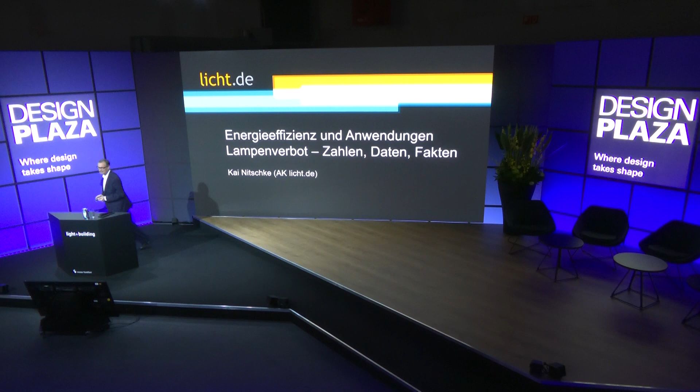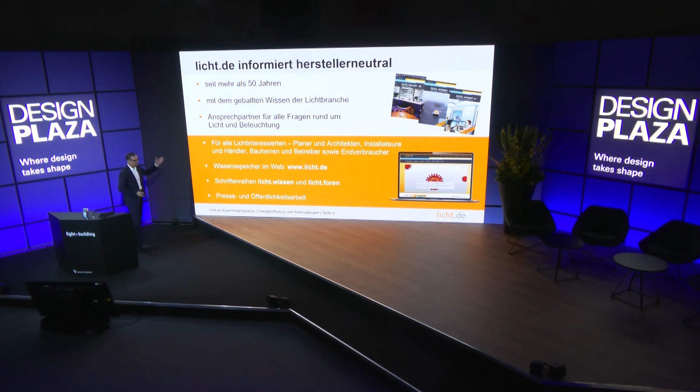My name is Nitschke, I am from licht.de, working group licht.de. Who is licht.de? It is a neutral platform. You can find us on level 0, 3.0, in existence for more than 50 years. We are a neutral source of information, the accumulated knowledge of the light industry. I work for one manufacturer, but we are a neutral source of information. Good for you if you need information.

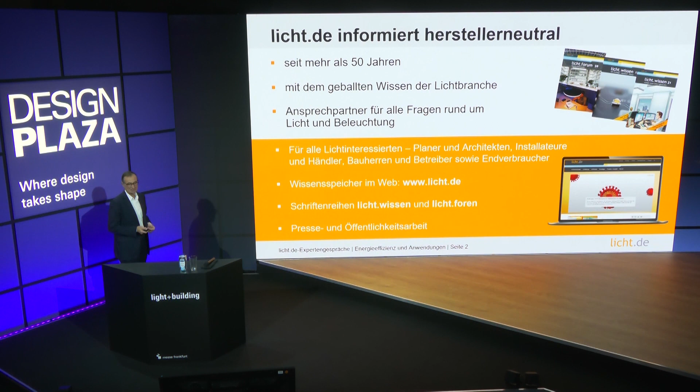So we are contact partners for everything that deals with light, and our target group, our customers, are people who are interested in light: planners, installation, architects, owners of a building, operators, and consumers. And we do have a manifold information offer on the internet, just like our publications that you can also see downstairs in Hall 3.0. We do have this very intense PR activity.

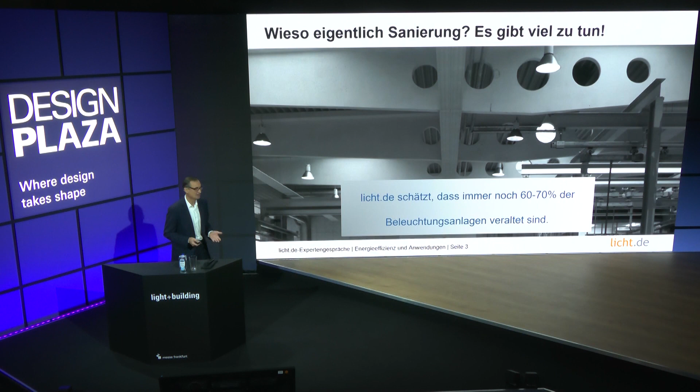I personally am working in the light industry since the year 1980. I always dealt with renovation of light lamps. Do you remember the 38mm fluorescent lamp? They changed up to 26mm in the past. They are the ones that are phased out because we simply have better alternatives.

Looking at this chart, you see that every year we talk about 12.3 billion euros spent for electricity for the lighting design, and we're doing so in areas that are non-residential housing. We talk about 2 million of them in Germany. It is the non-residential buildings where we also need heating. We talk about garages, about agriculture, but garages are not included, agricultural buildings are not included. And we talk about a net floor area of

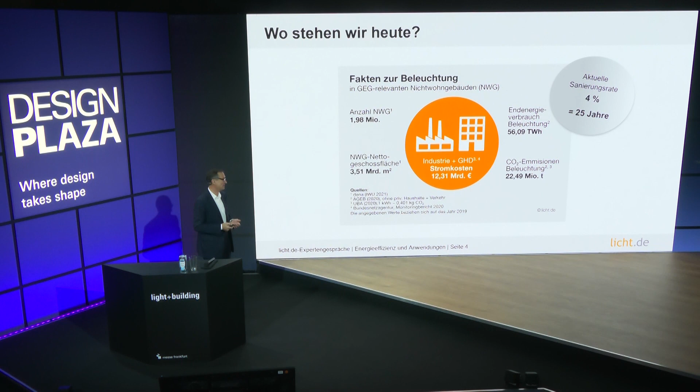3.5 billion, and 4% are being renovated every year. So it'll take 25 years until everything is renovated and up to the latest state of the technology. So we strive to make headway, and that's what I'd like to show.

This graph shows you - Jürgen Waldorf has already shown you, Jürgen Waldorf from ZVEI, these are the official regulations. So next year, the thinner and the thicker fluorescent lamps T5 and T8 are no longer allowed to be sold. If you know a wholesaler who sells, you're allowed to sell, but we're no longer manufacturing them.

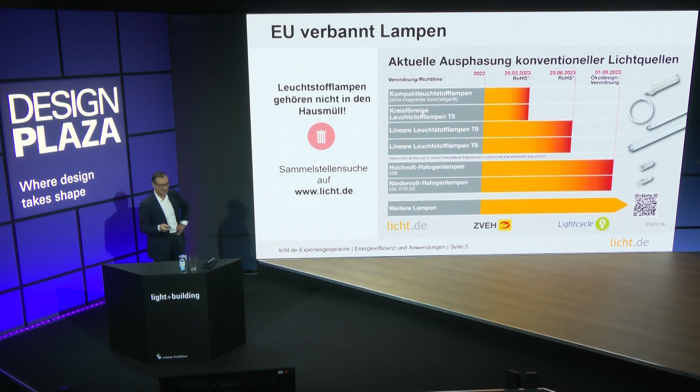And then we also said this red symbol is important for us. The old lamps cannot be used for domestic waste, so don't throw them away in your domestic waste. Then in August we have two regulations, ecological design and RoHS, so no mercury via the lighting products, and that's why it is being phased out. And that only works if we have efficient alternatives.

And if we retrofit everything, think about the old units, something we discussed at the beginning - this is what we had before. We're talking about energy cost savings. Nothing is more updated and topical than saving energy costs. The old products are being phased out.

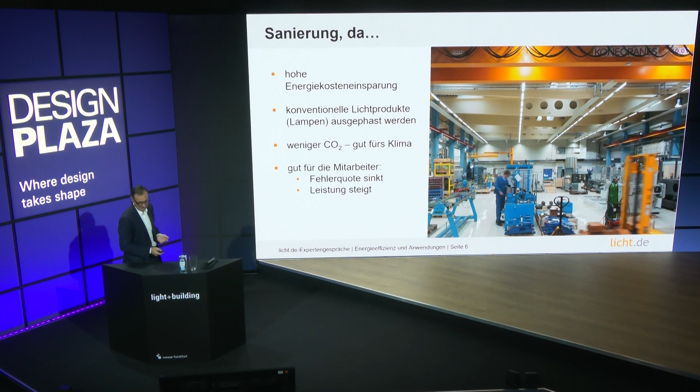That's good for our environment, less CO2 emissions, and I will show you a chart later. It is good for our employees: better light, better working conditions, more performance, fewer errors. So light has an enormous influence on the working performance and the number of errors.

Renovation, in different ways and manners. The most simple solution is retrofitting. That's simple, right? As you see, retrofit is not the best solution, but at least the easiest. It's better not to change a new light bulb in an old lighting system, just change the entire lamp. So savings potential will increase, but also the effort will increase.

It is even better if we do something that we call light management. Are we doing that? Sometimes. Often, not really. So that's what we have to do. During this time, in the next years, we'll see that everything that is operational will have light management.

And I am from licht.de, so we give you a lot of hints for light planners, for those who plan lighting design. If you plan light design professionally with the right values and the right factors, by taking into account the right criteria as part of a professional light planning, one can save even more energy. Can you quantify? Oh, yes, we can. So here again you see this staircase graphed in a different way.

You see the savings values, relative savings on a percentage basis, and you can also double-check in euros for your current situation.

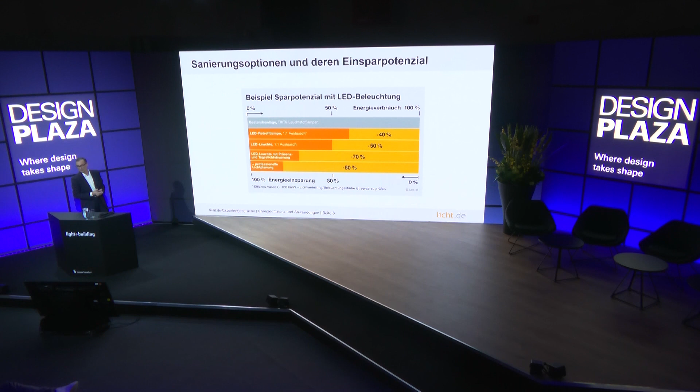You save up to 80%, as I just said, by taking into account daylight and presence control, and professional light planning. Looking at all the building blocks, what do we need?

Of course, we need a lamp. The lamp has a certain efficiency.

Do you know the subsidy program BEG, the German federal subsidy for efficient buildings? It's easy to get the money from the state, 15% of the retrofit, and the requirement for this subsidy for light strips is 140 lumens per watt.

The light industry can do much more than that. We talk about 180 lumens per watt in our light bands. If you have this type of lamp in your company, in your installation, you save energy. You save money only by having a more efficient, better lamp.

Fewer lamps, less performance, and still, at the end of the day, the lifespan. So you have different products.

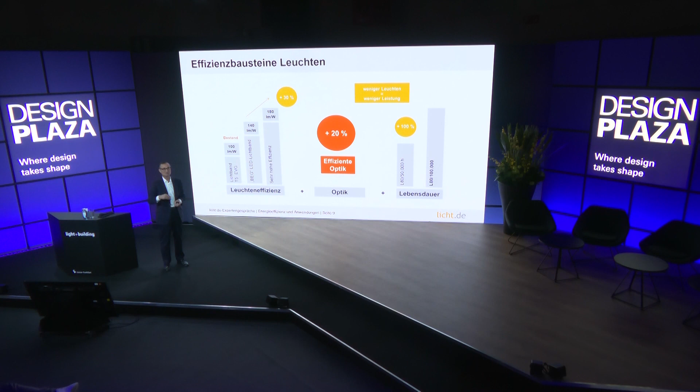We have this so-called L80 value, 50,000 hours, and after 50,000 hours, 20% less light. And we have products that are not as good—after 50,000 hours, 30% performance loss. They will be cheaper, of course.

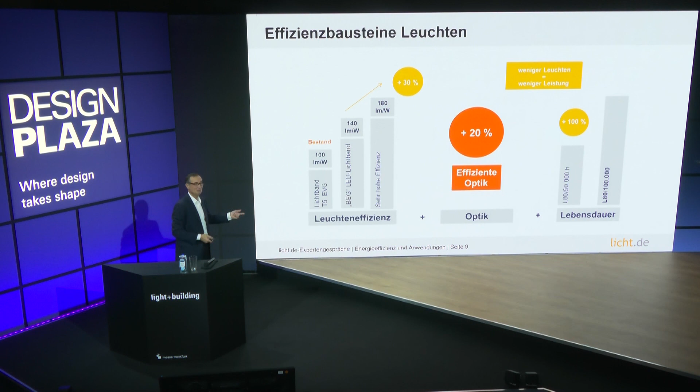Quality is an important question. We talk about the life cycle of a product and the price. So these efficiency components are required for a lamp.

We also have the sensors. The sensors will be most sustainable when we talk about daylight and presence, as checked on this chart.

So we see daylight is used—we have the first row of lamps, and then we start to dim the light, because in the room you have the daylight, as we see it right here. This is an essential component of high savings, depending on the daylight you have.

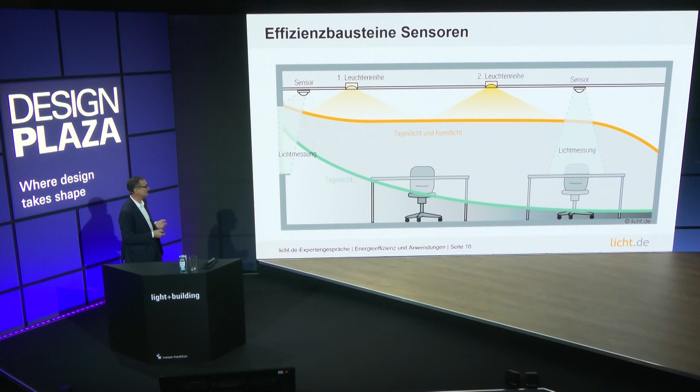And you see, the building energy laws give us a lot of help for the calculation, so that we can do the daylight calculation. This looks like a very professional way of planning the light situation in your building. And here again you see presence sensors, daylight usage, you see what happens during the day.

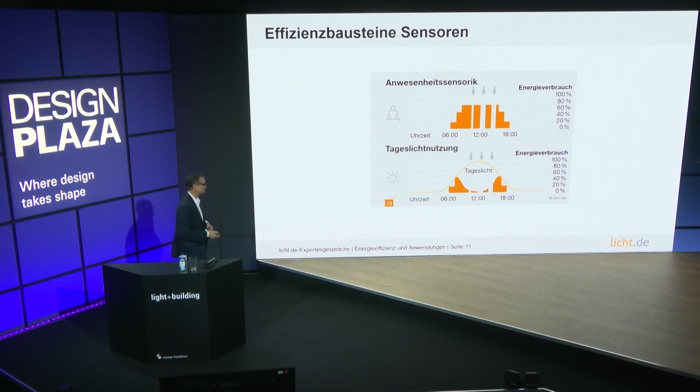And we also have savings potential. This is how we generate our savings potential.

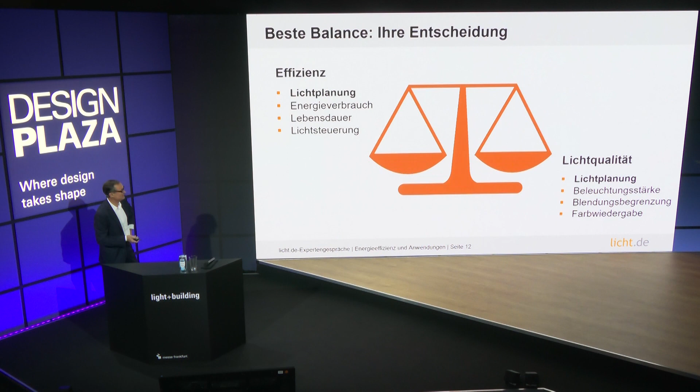Now I would like to see some scales. Here we go—everything in balance. The best balance is your energy savings level, and on the other hand, the light quality.

There is one thing we should not do: energy efficiency should not be top and light quality down. Energy efficiency is not always king. As part of a professional light plan, all these factors at your right-hand side are being planned.

And we see that our employees have better performance, produce fewer errors. So we should always be in balance.

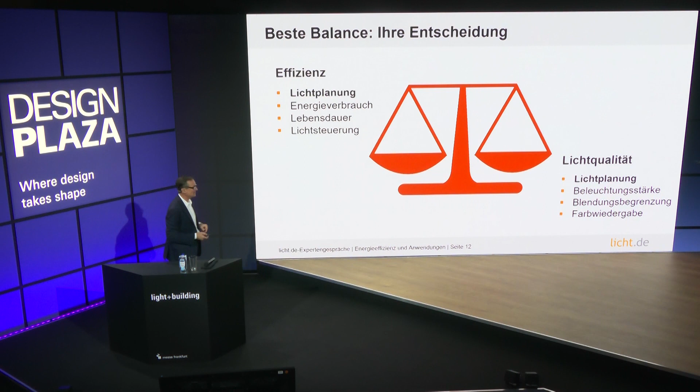Our efficiency is something that you see with the energy consumption, the life cycle, and the light control. So light quality plays a special role if we have a good system that is planned professionally.

And for this chart, since 1995, our colleague did this on behalf of the Metal Workers Union. He wrote this as a university thesis, wanting to see and prove what happens with workers' performance if you have a higher level of light.

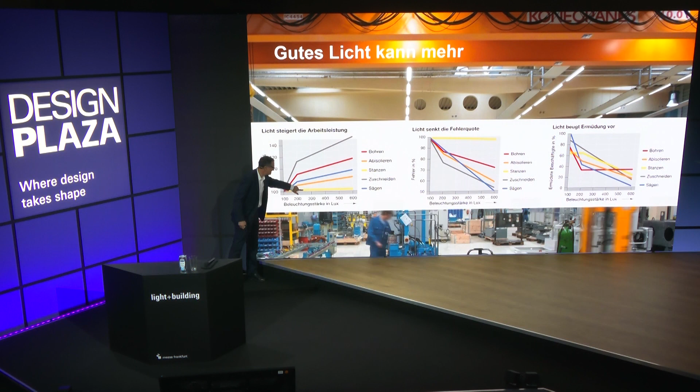So these are all metalworking activities. There is just one yellow line, and that's the punch. You cannot improve—punching doesn't require light. In the punching operation, you see no changes.

All other activities indeed led to a situation where more light led to a significant improvement in performance.

And the punch is also important for the error rate—that is an exception to the rule. All other activities lead to a situation where the error rate is reduced by increasing the strength of the light.

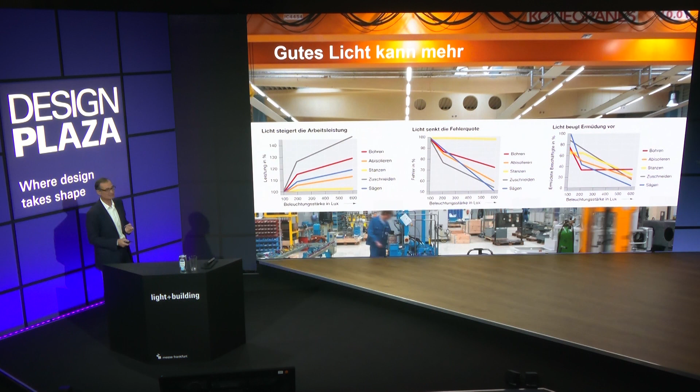For the number of employees who felt tired with the light situation, we understood that all activities led to a situation where better light improves your general fitness, so you feel less tired.

Part of my presentation deals with simplifying things, and since I am from licht.de, I must say we have also issued a checklist, for instance.

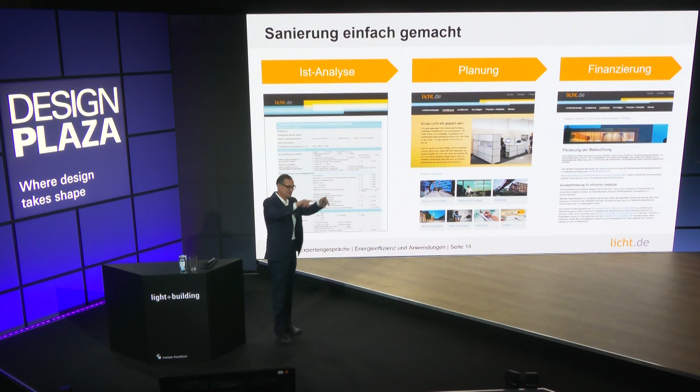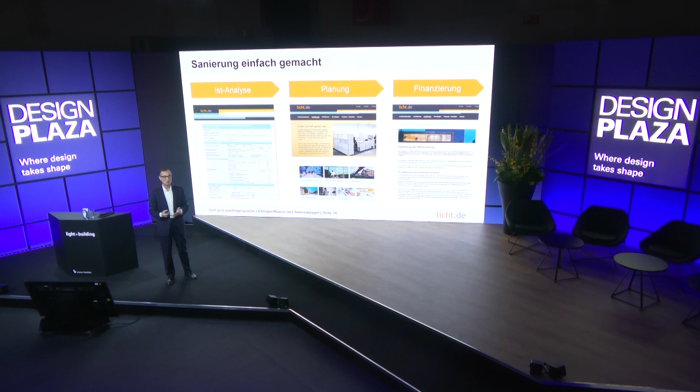If a lighting unit is discussed today, many people simply check a piece of paper for the lighting design, but do they check all the criteria that are important? I asked one of our wholesalers: if you get a task for light calculation and light plans, what percentage of cases need further information? The answer was 100% - everybody asks, because the majority of light requests have errors. They need further information, they don't have all the data, they don't have the checklist.

We, as licht.de, give you all the information. This is also true for planning for all relevant applications. We have tables, hints, guidelines - everything you need to do better professional light planning.

On the right-hand side, financing via BEG - the German federal government gives subsidies, 15% of the costs for the owner of a building. With an energy consultant, you get 50% subsidies, and also for planning - if you do light planning, you might also receive subsidies.

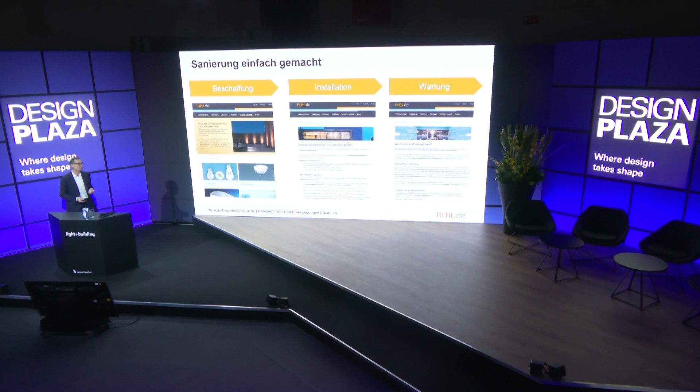It's pretty important in further phases of light design, planning, installation and maintenance. We from licht.de have the right information for you that will help you commission your light installation and operate it well and efficiently.

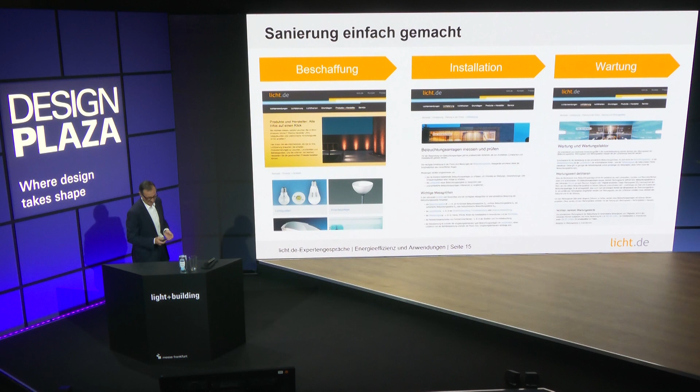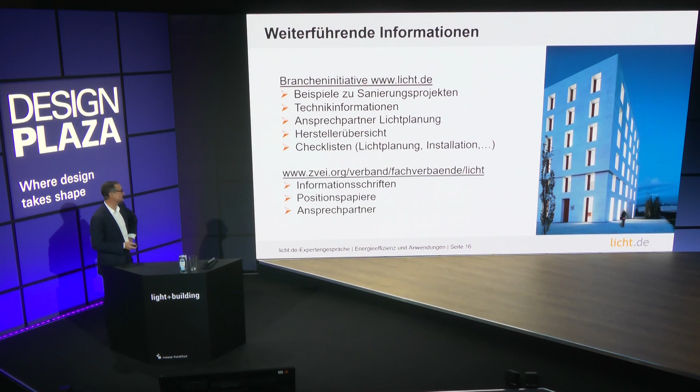We have been doing this for a long time - further information, examples for renovation projects, retrofitting, technical information, contact partners for light design, overview, checklists. That's one of my favorite topics: checklists on licht.de for download and further information.

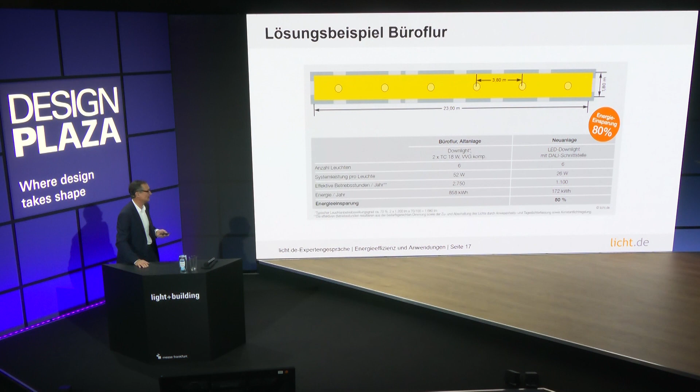Again, we've got this installation with 80% where you also include a dimmer in the calculation. Let's have a look at the logistics hall - here we talk about savings of 65%.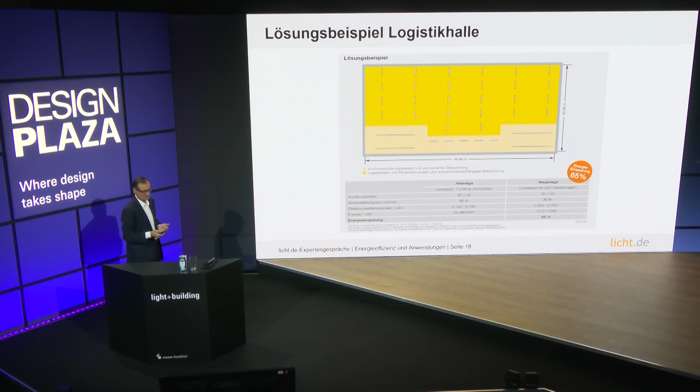Before that, you use sensors to measure the savings. If the owner of the building wants a light control system, daylight plays a major role because most logistic halls have skylights or windows - cupolas or light strips - really good skylights that help a lot, increasing daylight strength and reducing energy consumption.

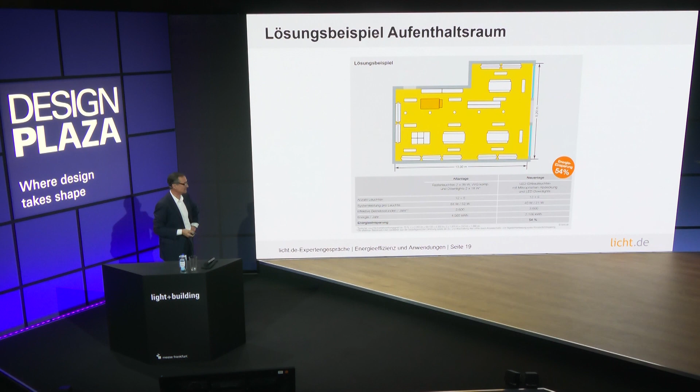This is the break room, also a good example of energy savings. All examples can be found at licht.de - good reasons to retrofit, especially with increasing energy prices.

I don't know where you stand when it comes to energy prices. Three years ago we talked about 18 cents. A couple of weeks ago, 30 cents. Looking at feedback from my colleagues who talk to customers, energy prices are like 40 cents right now.

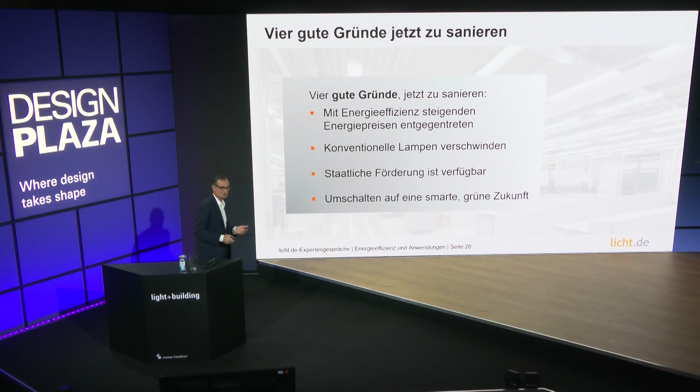This absolutely has to be taken into account. When I talk about energy savings, it's the second price tag - this is how much the lamp costs, and this is how much you save. Don't only talk about the price tag - there is a second price tag: how much do I save?

RoHS - conventional lamp, single lighting regulation. The subsidies also apply for municipalities as part of the National Climate Protection Initiative. We talk about 25% subsidies for sports activities for municipalities. This is available and has been so for many years.

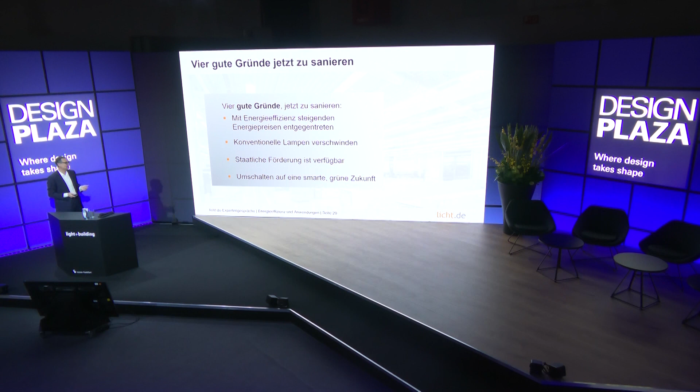Let us change for a smarter and greener future. If you want to read some more...